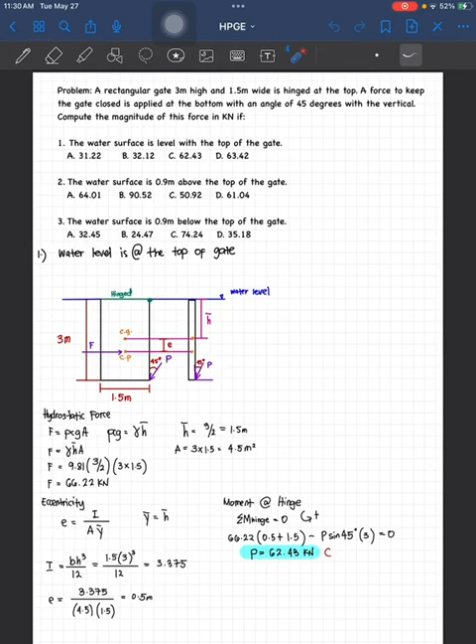So a rectangular gate 3 meters high and 1.5 meters wide is hinged at the top. So yung rectangular gate daw is 3 meters high and 1.5 meters wide. Tapos hinge siya sa top. A force to keep the gate closed is applied at the bottom. So para daw maging sarado pa rin yung gate, meron siyang force at the bottom with an angle of 45 degrees with the vertical. So 45 degrees with the vertical, ito horizontal to vertical, which is yan yung force.

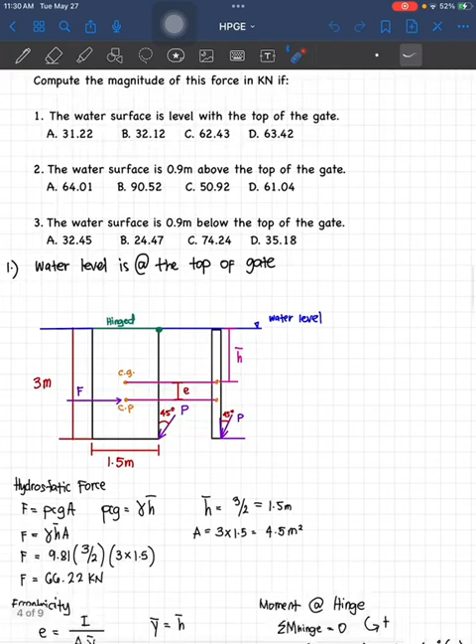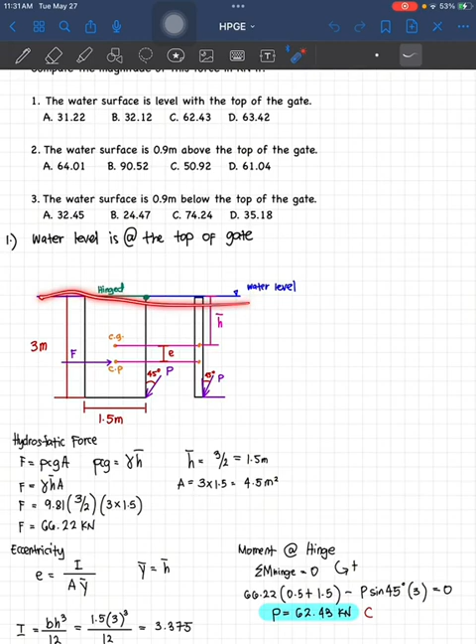Compute the magnitude of this force in kilonewton if, and hanapin natin yung magnitude ng force, which is yung P. If, yung number 1 na situation, or the water surface is level with the top of the gate. So yung water surface is naka-level lang sa top of the gate. Kita na sa figure. Guys, hindi binigay yung figure dito. Dapat ikaw gagawa. Yung water level daw is nasa top of the gate. And pinapahanap is yung magnitude of this force, yung P.

Para mahanap yan, tingnan natin kung paano siya makukuha. So ito nga pala is yung object natin is rectangular, which is meron siyang center of gravity, CG. Yung gitna niya. Tapos yung center of pressure. Lagi yan guys. Lagi mga engineers. Meron dyan center of pressure. Tapos ito is eccentricity. Lagi yan sa hydrostatic, which is plane surfaces. Tapos nandito nakalocate yung hydrostatic force niya, which is yung F. Kakailanganin natin siya. Kasi siya yung tumutulak para magbukas ng gate.

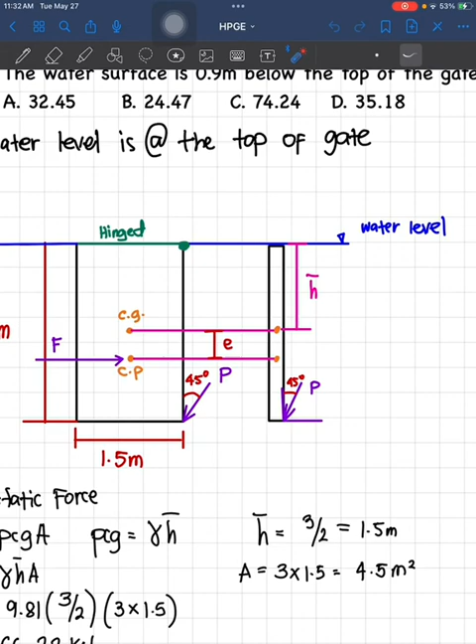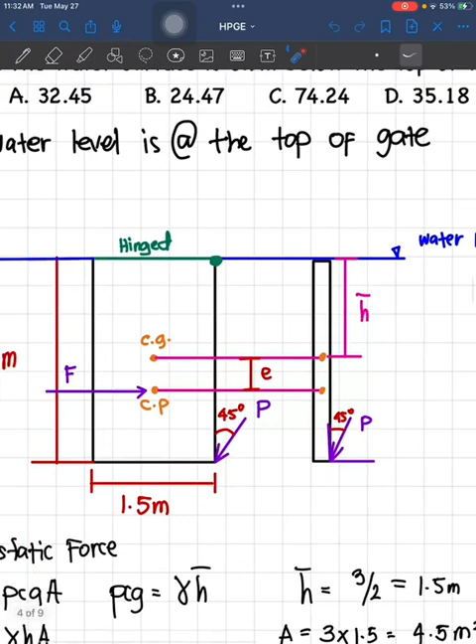So ito naman yung, sabi dun is, a force to keep the gate closed is applied at the bottom, which is yung P. Ito yung hinahanap natin. So kailangan natin itong hydrostatic force. Kunin muna natin. Ang formula nga pala dyan is F is equals to PCG times area. Yung PCG is pressure at the center of the gravity of an object.

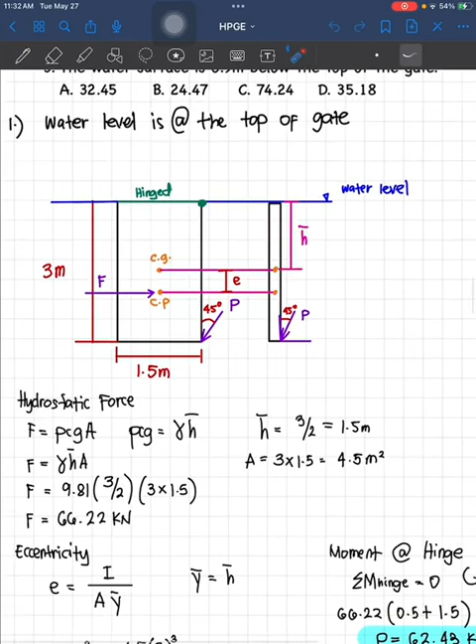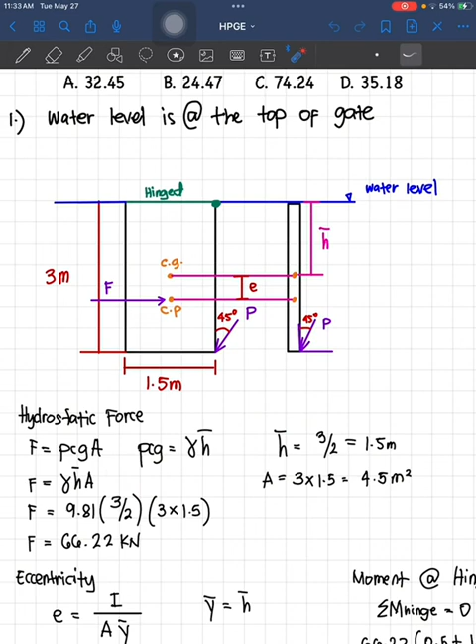Yung sinabi lang naman dito is water daw. Water lang naman. Water surface. So 9.81 lang yung unit weight ng water na gagamitin natin. Times yung lang center of gravity to the water surface. Yan yung height niya, or yung h bar na tinatawag. Kaya yan ang formula niya ng PCG. Kasi times natin siya sa A, which is, siya na yung hydrostatic force. Hydrostatic force is equals to gamma of water times h bar times area.

So, yung force natin is 9.81, yung gamma. Ang h bar is 3/2, yung kalahati ng buong rectangle. Which is kalahati lang naman yung center of gravity. 3/2 times yung area, which is 3 times 1.5, which is 4.5. Substitute, F is equals to 66.22 kN. Meron na tayong F. Para makuha natin itong P, magmo-moment tayo dito sa hinge. So, para makuha natin siya, kailangan pa natin ng eccentricity.

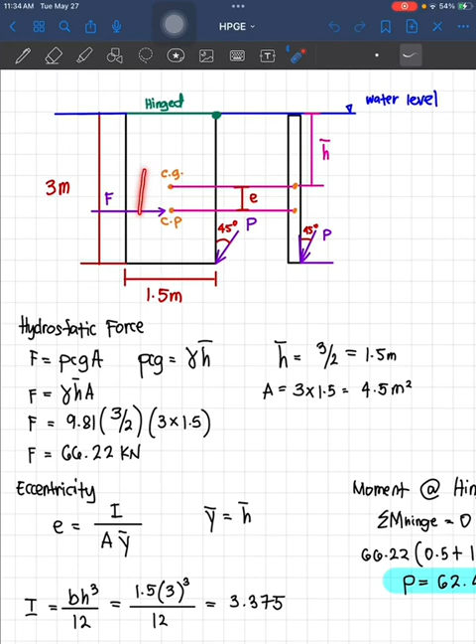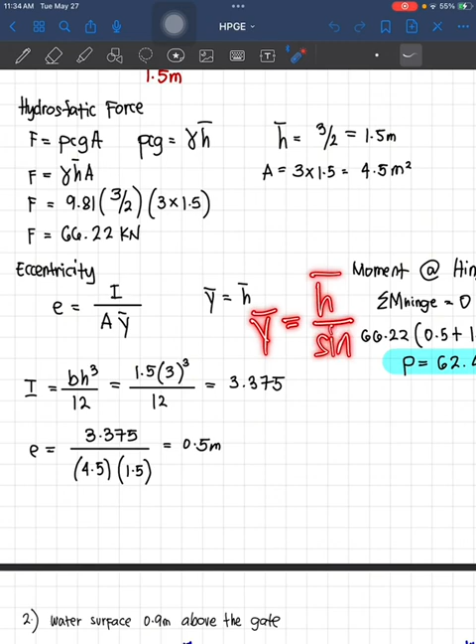Kasi yung moment arm nitong hydrostatic force to the hinge. So, kailangan natin malaman yung E, yung eccentricity. May formula yung eccentricity, tandaan nyo to. E is equals to I, yung moment inertia ng object, over area ng gate, and Y bar. So yan is Y bar is equals to H bar. Magiging ganito kapag hindi incline yung object o yung gate. May nakatagilid na ganyan. Pag nakatagilid na ganyan, meron ng angle. So ang formula na dyan ng Y bar is equals to H bar over sin theta. So mamaya magagamit natin yan sa susunod na problem.

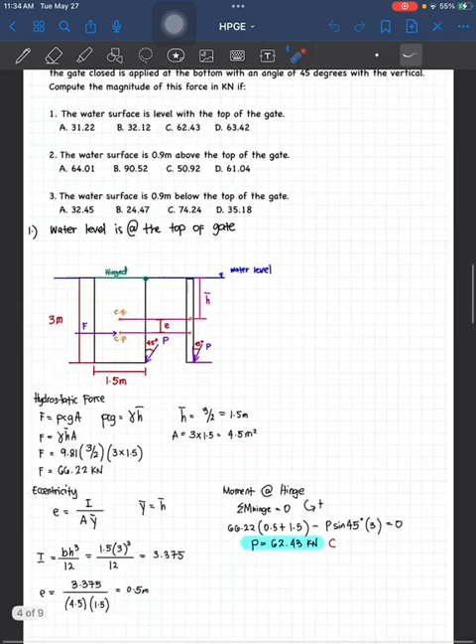So hanapin muna natin yung moment inertia. So pag rectangular siya, bh cube over 12. Base is 1.5. Yung height is 3 cube over 12. So, makuha natin siya 3.375. So, yung area is nakuha na natin 4.5 square meter. Yung Y bar is equals lang siya sa H bar, which is 1.5. So, substitute, E is equals to 3.375 over 4.5 times 1.5 equals 0.5 meters yung E natin, yung eccentricity. So, kompleto na. Meron na tayong moment arm sa F, papuntang hinge. So, ito namang moment arm ng P natin is 3. Kasi pantay lang naman yung tubig dun sa ating gate.

So, magmo-moment tayo sa hinge. So, summation of moment at hinge equals to 0. Bakit tayo magmo-moment? Kasi para mahanap natin yung P. Tapos, ang component nga pala niya is ito. So, wala sa kanya yung angle. Sabi ko nga, pag wala sa kanya yung angle, sin yan. Pag nasa kanya yung angle, which is cosine. So, ito nga pala yung moment arm ng P. Yan yung distance niya, which is 3.

So, 66.22, yan yung hydrostatic force natin na nakuha, times 0.5, which is yung E, plus yung kalahati na itong 3/2. So, 1.5. Minus P. Ito na, P. Sin siya. Kasi wala sa kanya yung angle, yung component. Tapos yung moment arm niya is 3, equals 0. So, yung P is equals to 62.43 kN.

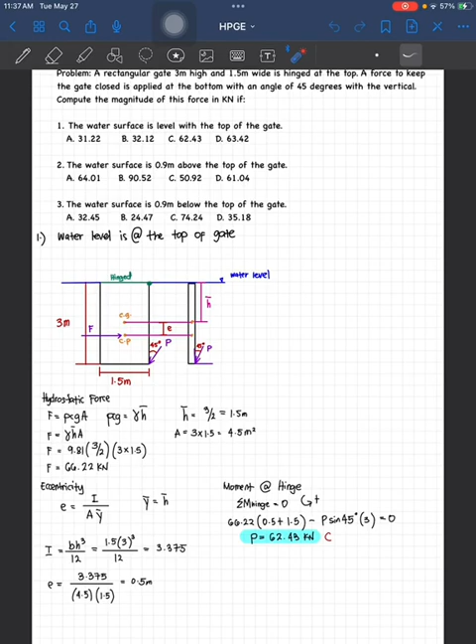So, pinapahanap is kilonewton. Sabi ko, pag kilonewton, palitan ko na lang dapat pag naka-meter. So, hindi na natin binago yung units. So, next is number 2. The water surface is 0.9 meters above the top of the gate. So, yung tubig daw is tumaas ng 0.9 meters.

Ang gagawin natin is parehas lang ang pinapakuha, yung P ulit. So, yung hydrostatic force is F equals to PCG times A. F is equals to unit weight of water times H bar times area. So, yung H bar is nabago kasi tumaas yung tubig. So, yung H bar is center of gravity to the water surface.

So, 3 halves or 3 over 2, plus yung tumaas daw na water surface, which is 0.9, H bar is equals to 2.4 meters. So, yung area naman is, kagaya lang kanina, 3 times 1.5, which is 4.5, yung area ng gate. So, F, substitute natin, makukuha natin yung hydrostatic force, which is 105.948 kilonewtons.

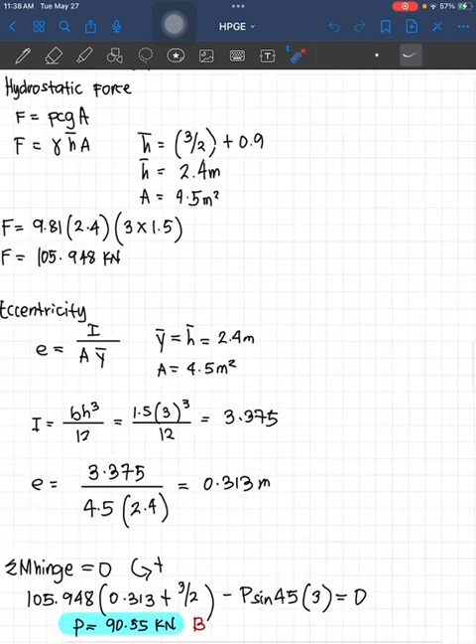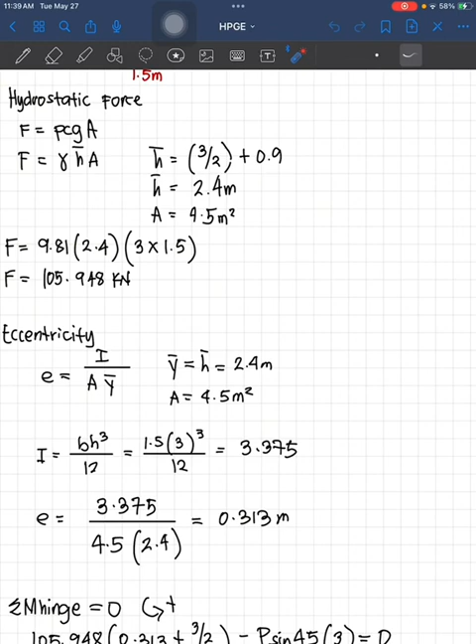So, kunin ulit natin yung eccentricity para makomplete yung moment arm papunta sa hinge. Eccentricity is yung moment of inertia. Pag rectangular is BH cube over 12. Hindi naman nabago kagaya nung kanina, yung inertia niya is 3.375. So, substitute lang natin ulit: 3.375, yung I niya, over yung area na 4.5. And yung Y bar, mababago nga pala dito kasi umangat. Na-solve na natin yung Y bar kanina, which is yung H bar, 2.4. Substitute, E is equals to 0.313 meters. Nakuha na natin, kompleto na tayo ulit.

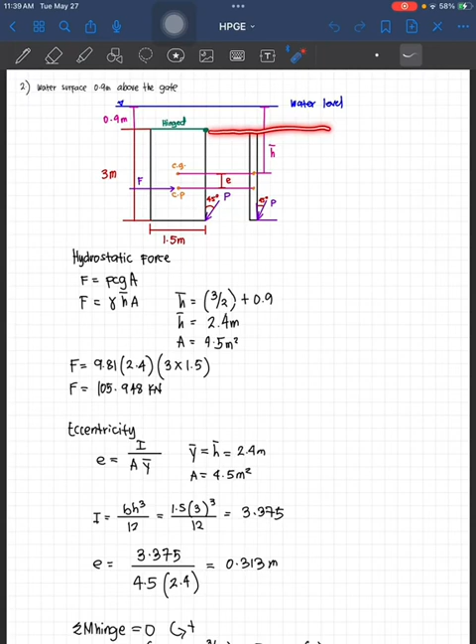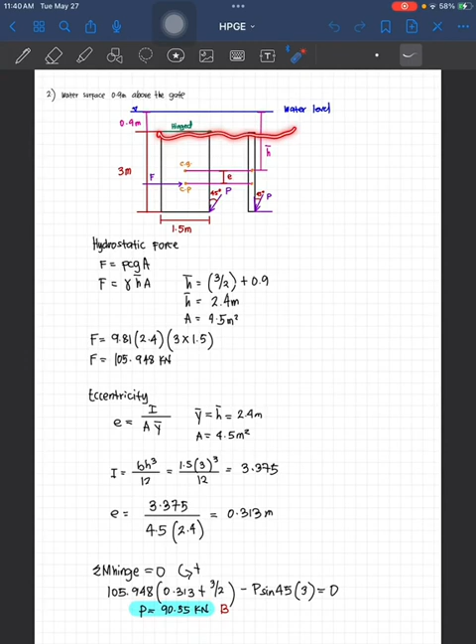So, mag-moment ulit tayo sa hinge. Diyan lang, hindi dun sa water surface. Dito na tayo sa hinge. So, 105.948 times yung 0.313, which is yung E, plus yung kalahati nitong 3 over 2. Ipa-plus na natin hanggang hinge lang. So, minus P sin 45 times 3, yung moment arm, equals to 0, which is P is equals to 90.55 kilonewton, which is letter B.

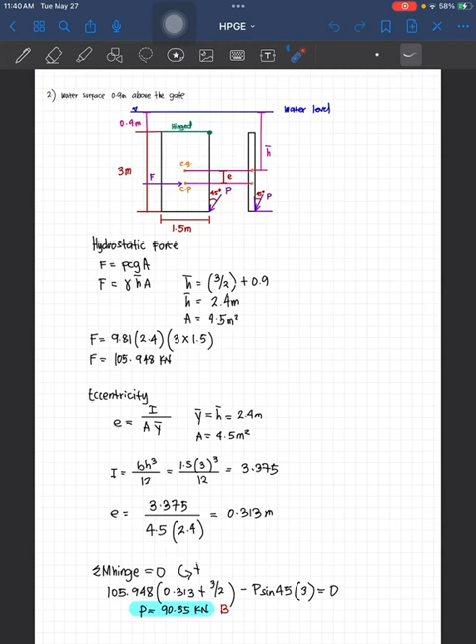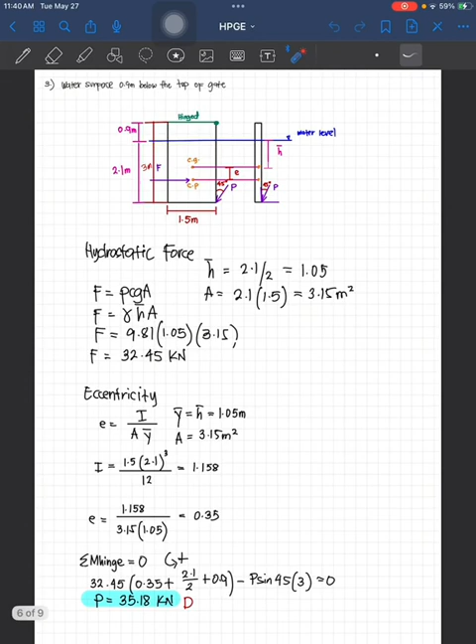So number 3 tayo. If the water surface is 0.9 below the top of the gate, so bumaba naman yung tubig, naging 0.9 meter below the top of the gate. Magbabago ulit. So yung hydrostatic force ulit kunin natin. F is equals to 9.81 times yung H bar niya, which is nabago hanggang center of gravity hanggang sa water level, which is 3 minus 0.9 kasi bumaba siya ng 0.9, magiging 2.1 from the water level, 2.1 over 2. So, center of gravity sa gitna yan. Gets nyo na yan. 1.05 yung H bar.

Yung area naman is 2.1 times 1.5, nagbago yung area, which is 3.15 square meter. Substitute lang ulit natin dito sa hydrostatic force. 32.45 kilonewton yung hydrostatic force natin. Meron na tayong F. Kunin na naman natin yung E, eccentricity. So, inertia ulit: 1.5 times 2.1 cube over 12.

Nabago ulit yung dimension ng gate kasi bumaba nga yung tubig. So, yung I is equals to 1.158. So, substitute ulit natin dito sa formula ng eccentricity. Yung 1.158 over 3.15 yung area, and times 1.05 kasi yung Y bar is equals to H bar lang ulit, which is yung E is 0.35 meters.

So moment ulit tayo sa hinge. Hanapin ulit natin yung moment arm, F to hinge. So 32.45, which is yung hydrostatic force, times yung moment arm papunta sa hinge, which is 0.35 yung E, plus 2.1 over 2, itong kalahati ng 2.1, plus 0.9, papunta siya sa hinge. So, minus P sin 45 times yung moment arm niya papunta sa hinge, which is 3, equals to 0. So, shift solve, makukuha natin yung P is equals to 35.18 kilonewtons, which is letter D.